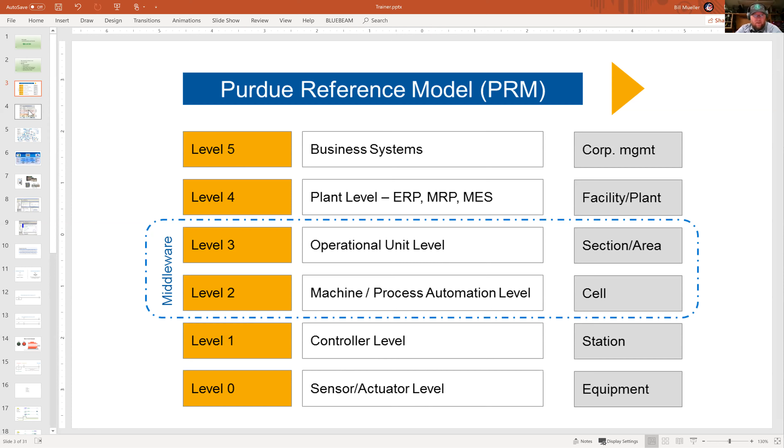Above that is actually how the plant gets designed. And from what I understand from dealing with other chemical engineers, your classes actually deal with this as one big whole, where they design the process, they end up sizing the tanks, doing all the math and stuff. That whole process of when you guys build your facilities incorporates all of this. For this particular class, and from what I've seen so far, you guys are really just focusing on level 1 and 2. To remove some of the abstraction, this is another way to represent the same data.

Up here, this is all the business services and stuff, but this is where you start getting all your reports. I know this is hard to read, but you guys can pull down any Purdue model thing and it shows you 50 different ways. But it's just a way to segment it out, and there's people whose entire job is just one of these types of segments.

What's kind of cool about what you guys are doing is you're actually covering 3 of these at the same time with that VFD and the controller and that sort of thing. This also gets closer to the plant floor and for specific processes. So if you end up having an entire biotech processing line, these pieces down here at the 1 and 2 would be an individual bioreactor, bioinoculation skid, that sort of thing. Or if it was for food processing, it might be a mixer or an extruder, that sort of thing.

And for you guys that really want to get into plant design, this is what it really looks like when you start breaking it out. So all 3 of these slides are the exact same thing, getting closer and closer to how real life goes. If you look really close down here at the bottom, you end up seeing this box here with a drive, controller, and I/O. This box here is where the panel you guys have built would live in this entire system that would be a plant floor.

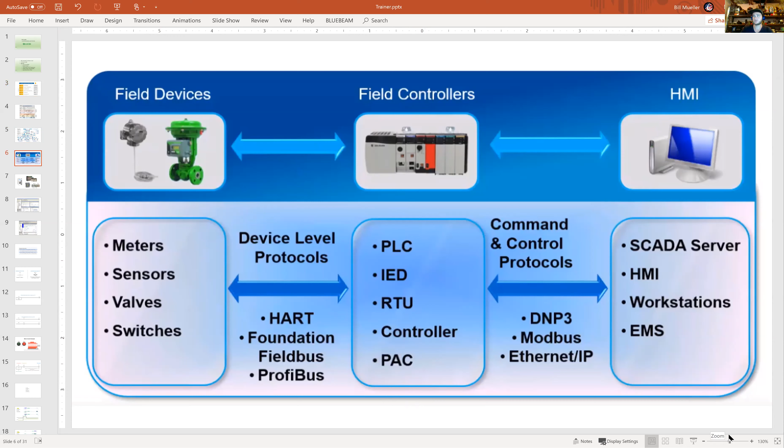And if I saw the picture correctly, you have, can you see the right-hand side of the screen or is it blocked out? Should be able to see it. I know in the very top right, there's going to be a blocked out section for the recording. Oh, okay. Let's zoom it out just a little bit and see if I can make it a little bit more visible.

So the HMI is the human machine interface. That's where you're going to make all your screens and where you actually end up interfacing with everything that's beyond just the normal push buttons.

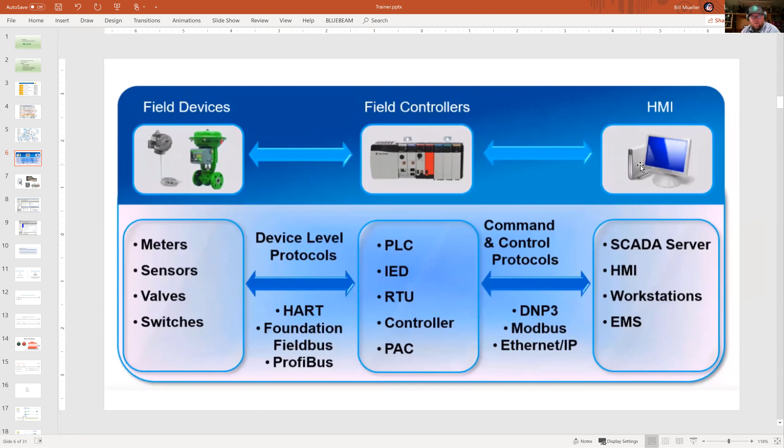As far as controllers go, there's a ton of them out there. Here's a picture of what yours should look like. And these ones are more what I deal with in my day-to-day life. These 3 processors here are different parts of the same family. They're all Allen Bradley controllers. This one has to do with safety and verification for like nuclear plants or highly sensitive wastewater type stuff. These are just general purpose, and these are for smaller scale projects.

Siemens processors, they're around. A lot of the world's been sliced up by manufacturers. So Allen Bradley has most of North America. Siemens has most of Europe, European style programming. So depending on where your equipment comes in, you'll see one or the other.

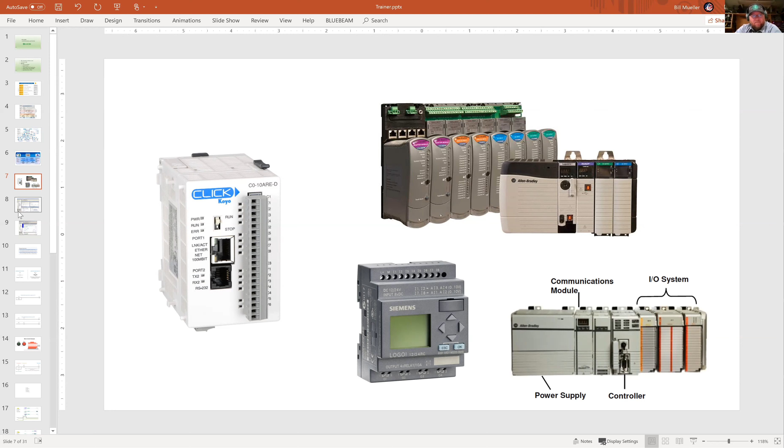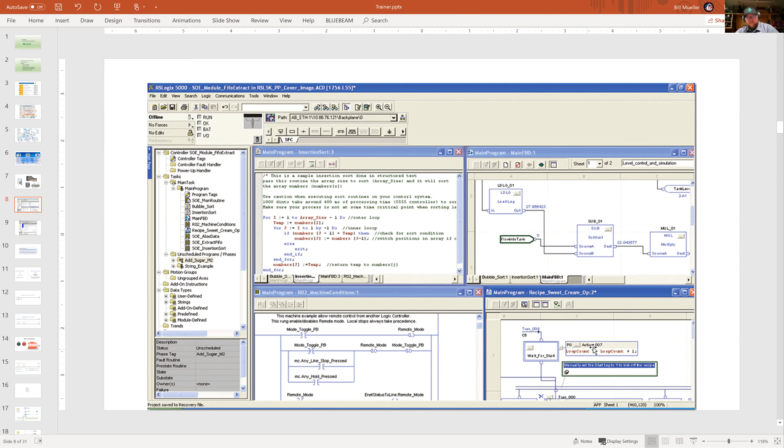And down here on the bottom right, I had to dig deep to find an example of this, but sequential flowcharts. I don't know anybody that programs in them, but I hear it's really popular in Europe. So sorry, I can't help you too much on that one.

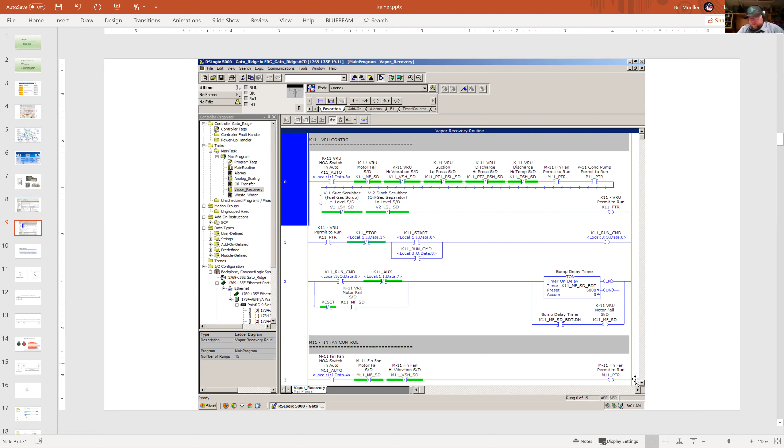And all these other ones are process specific safety stuff. So if any one of those safety components end up coming in wrong, then you don't want to be able to allow that pump to run. The other big important piece on here, I'm going to try zooming in just a little bit so you guys can see this, is normally open versus normally closed. You covered it before.

The normally open contact here turns to a 1, or is energized, when it's closed. These guys here are normally closed contacts and are energized when they're opened. The reason for that is that for really important safety components like the motor fail, vibration, low pressure, high pressure, using a normally closed like this guy would tell you if a wire fell off.

So if you end up having a fail-safe type system, you want to make sure that even in a failure condition, if somebody's out digging a trench someplace and cuts a wire, you want to have it assume that it's in a fault condition. So selecting these guys was really important.

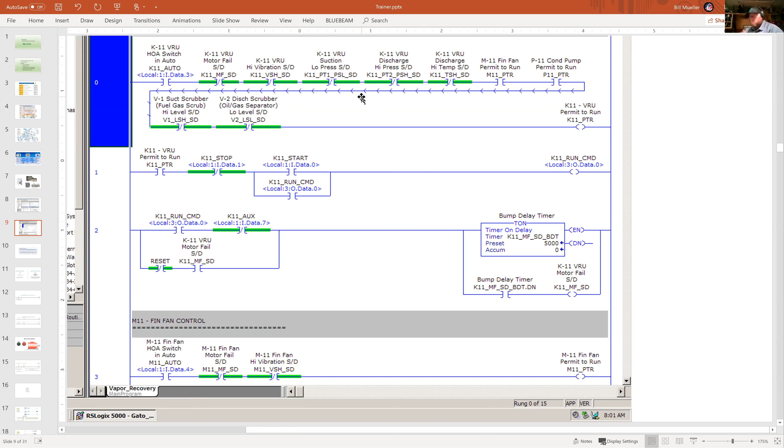They probably have a version of them out there where 1 means good. But in this case here, they're using them as a fail-safe condition. And it's all process specific. I don't know if I explained that great, but that's the reason for all these. And actually, this timer is also another safety condition as well.

When you have these very large VFDs, they take a lot of current. And when you start up a pump, a 3-phase pump or even a 2-phase pump, they use big contactors. They look just like relays. And the really big ones, they're like 2 fists that when you turn them on, they'll clink ka-chunka together to make the electric current go through.

And then there's a big spring that when you turn them off, it actually has to ka-chunka pull them apart. And that's because there's so much voltage between it. You need to have that big surface area and spring assist to be able to pull it apart without them welding together.

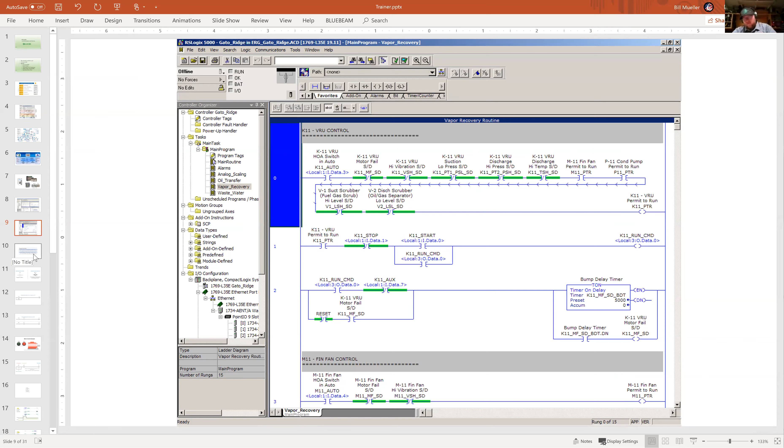The timer that you're seeing here is intended so that you can't just go up there and go start, stop, start, stop, because that thing will be just going ka-chunka, ka-chunka until it welds itself together. So this is also a part of the safety circuit. So anyways, that's what we're looking at there. Yeah, that's process specific. When you guys go to develop your own, you'll dial those in yourself.

So I made a reference to the 4th dimension. And this is one of the parts that's really hard to see when you first start programming. It requires an innate feeling of how the program executes. So every rung ends up executing from left to right, top to bottom. Seems very easy to understand at first, but later you'll see that because of this, we can end up doing some really fancy

programming that's non-intuitive. Every time the PLC code goes from the top of the program to the bottom of the program, that's 1 scan. And the PLC, when it's on scan, just keeps on ripping through each of the rungs in the same order. I copied this from somewhere else. It should be obvious that a PLC could complete many scans in a single second.

But an example of this would be that, out of those processors we saw above, the Allen Bradley stuff executes between 10 milliseconds and about 50 nanoseconds for a scan. I didn't look up what your Click was, but I would imagine it's probably between 20 and 30 milliseconds for the type of processing I saw it doing.

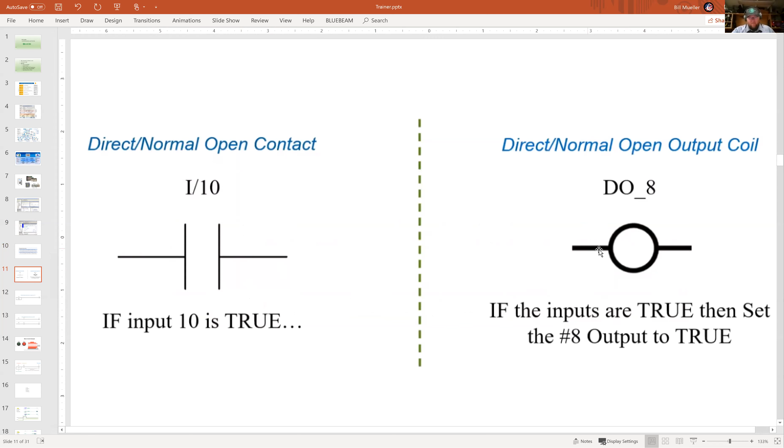And you guys used a set of lights, but realistically, you can use the same thing for controlling a motor. If you want to start the motor, if you use just the straight coils, like in the example from last week, you press start. As long as you're holding it down, the motor will be jogging. And if you want it to stop, you click stop, it stops. So that code looks just like this.

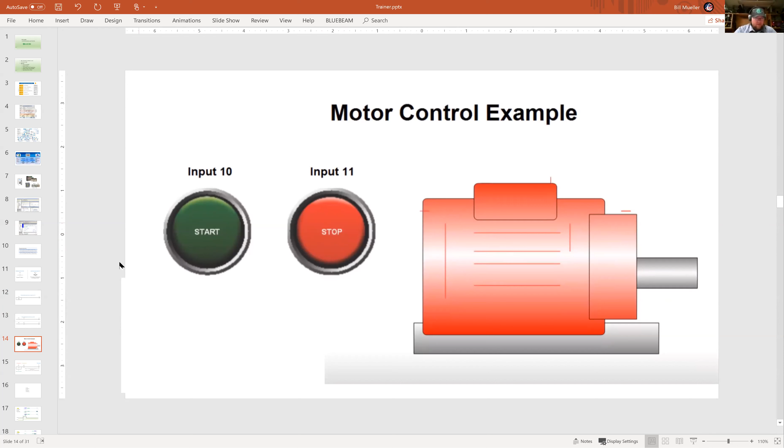So if we end up having either one of these be true, the motor will start. And it'll continue to run even after you let go of the start button until somebody presses the stop button. I'm going to go into a little detail on this later, but this is called a latch. And this is one of the primary things that a PLC is good at. And this only works because of the scan and playing with the fourth dimension. So we'll get to that here down at the bottom.

So any questions on the review stuff so far? Cool.

So these, except for the sequencers, are going to be the main components I'm going to cover for what you need in your toolbox when you're programming a PLC. These use those primary data type objects like the normally open, normally closed, timers, that sort of thing that's available to you, but it ends up putting them in a certain way that you're going to see repeated over and over again, that with practice you'll see where their application is in a system.

So the first one and the easiest one to do is a latch. And this looks a lot like that motor control. And I didn't number these because I spent like 5 minutes putting these together. But this is the same rung 3 different times, the same rung at 3 different periods of time. So this top rung is at its default bench state. A little green box on there means that it's passing electricity. Nothing on there means it's not passing electricity.

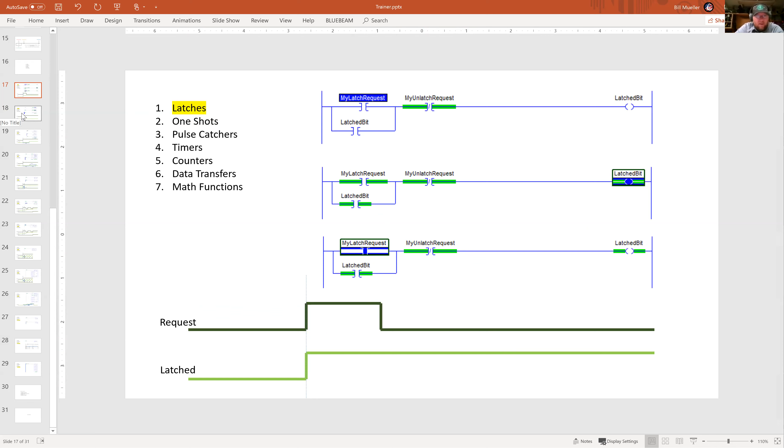One-shots. One-shots are my particular pet peeve. I wrote an entire LinkedIn article on why one-shots are a bunch of crap and why you should do it my way. But one-shots are really useful for non-obvious reasons. One-shots mean that you'll end up having a bit on for exactly one PLC scan. So if you're doing mathematical functions, if you're doing resets, it's always nice to be able to turn a long pulse into a single pulse for one PLC scan. And there are examples further down.

But the way this works is, again, 100% due to the way the scan works. So left, right, up, down. When we sit here at rest state, my request is off. So electricity is not passed across here. Request one-shot isn't there. One-shot working is not. On the very next scan, my request turns on. That's the edge right here. When it comes through, one-shot working is still not on yet. So we can go ahead and turn on the one-shot for that. We finish up, cycle around the scan, come back to the top.

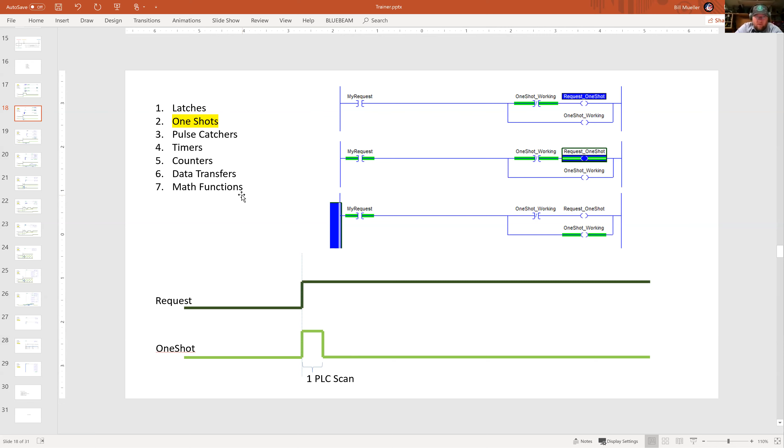My request is still on. But now one-shot working is on. So that means we no longer have the one-shot anymore. So as long as my request is on, we're only going to get one scan of this guy. So it looks just like this. On the leading edge of request, we get one pulse out of it. It's very useful. Well, this is important to build off of for the next section.

Timers. Timers are primary data types, and the timers in this case work the same way as they work on the Click as well. At their rest state, you end up giving it a number that it's going to count up to. In this case, this is done in milliseconds. So 3,000 milliseconds is 3 seconds. And what we're trying to do is delay this request bit by 3 seconds. As soon as my request comes on, the timer starts timing. These little dingles on the end here are the output bits. While it's enabled, the accumulator's counting up to 3,000. The done bit doesn't turn on until it reaches that time.

Here's the next one. We've reached 3,000. Done bit's on. Done bit's on here. So now we end up having the delay sequence. So this little piece of logic just takes a pulse and shifts it over 3 seconds. So you can either shift a pulse for 3 seconds, or we can hold it for 3 seconds. There's all kinds of stuff we can do. It seems rudimentary, but it's used all over the place.

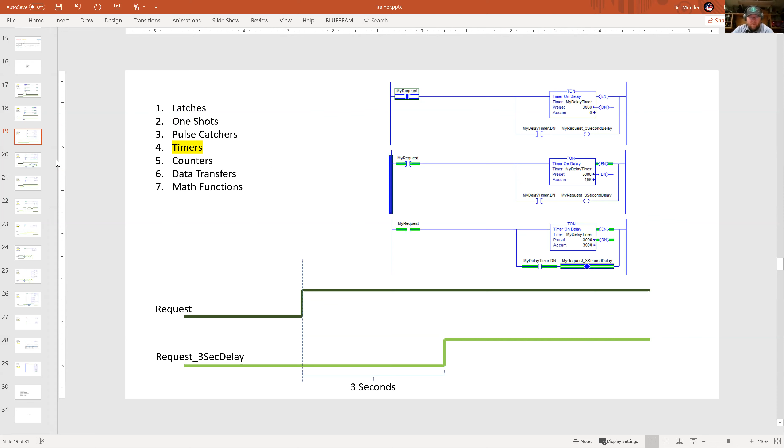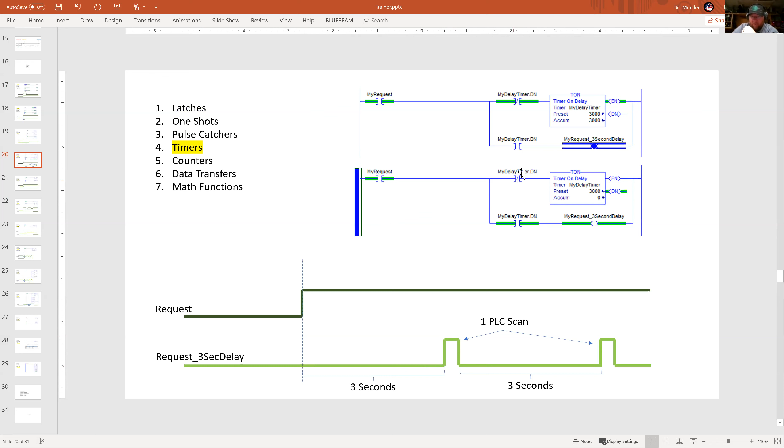And you never know when you're going to need something stupid like this. I've used it a lot. Actually, the most recent one that we used this way was for doing a video game in a PLC. We needed a game clock to synchronize user inputs with, and this was exactly the way we did it. But it's manipulating the scan time, the left to right, up to down, to make this work that way.

Counters are intuitive. It's basically just an adder. There are count ups and count downs and all kinds of other random ones out there. But when you first use this, it's a little non-intuitive. If you wired it up just like this, where you have the counter on one side, we're going to count up to 3 and then say we're done. If this was a push button and you push that button once, you would think it would only count once. But in reality, every single scan, it's going to increment once. So for as long as the request is up, it's just going to keep counting each time through.

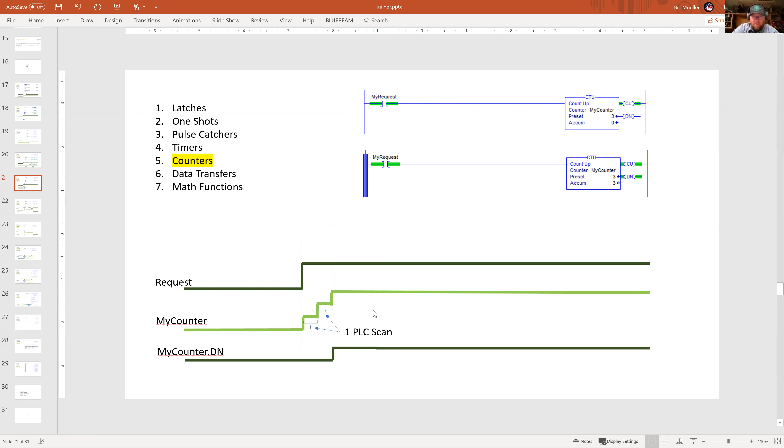The important thing to pull out of this is that this is one of those examples where if we ended up having a one-shot in here, we can end up with a count every single time that pulse comes in and synchronize it with the PLC scan. The other thing to catch out of this is the done bit. Just like the timer, once the accumulator hits whatever your preset was, you'll get the counter done bit as well. So request comes in, counts 3 PLC scans, and then you get 1 bit here.

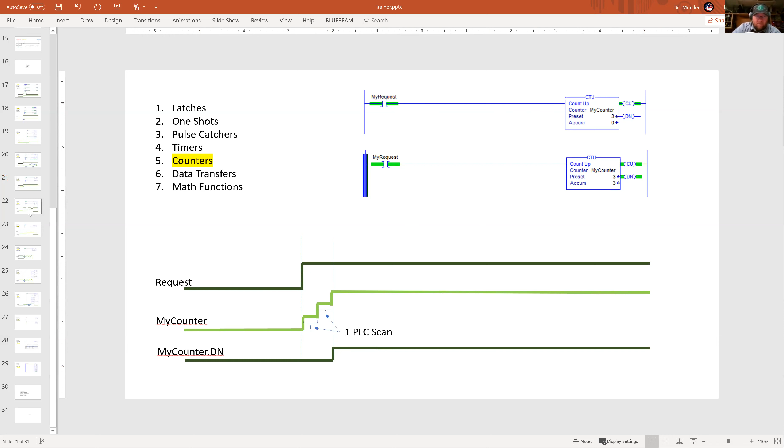How can we use that for our help? Here's that one shot. This is the one shot we did right before. We can end up saying, here's my request, turn it into a one shot, use the one shot to increment, do the counter. So request comes in, comes up, is held for longer than 1 scan, but the counter only clicks up, chink, chink. When you release the my counter here, I did this wrong. So this little slice should actually be on the leading edge, not on the falling edge. So this one's done right, and that one's done wrong.

But each time you press the button, it'll count 3 pulses, and then once you get to the 3 pulse, there you go. But this looks like garbage, and if you ended up having 1,000 valves or whatever it is to do, it's a little bit complex. So you can end up rearranging it so that you can use that same one-shot logic, and instead of having an output in the middle, go my request this way, and it'll count up the same way, except again, this is on the wrong thing.

So building a one-shot this way, hold on one second, through the front door. So

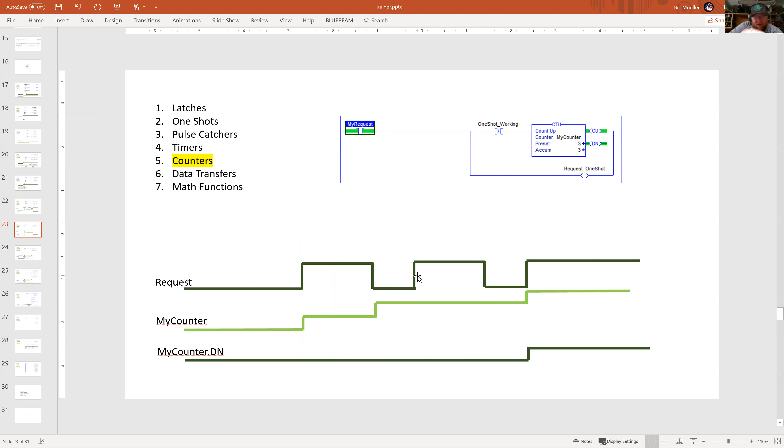Yeah, so you can start building it up this way using that timer piece. Messing with it even further, counters also have a reset bit, just like the timers. So if for whatever application you're doing, you want a repeating waveform that looks like this, you can use that counter done bit to trigger the my counter reset. So as the request comes in, my counter just starts, the accumulator starts giving you this waveform generated like that.

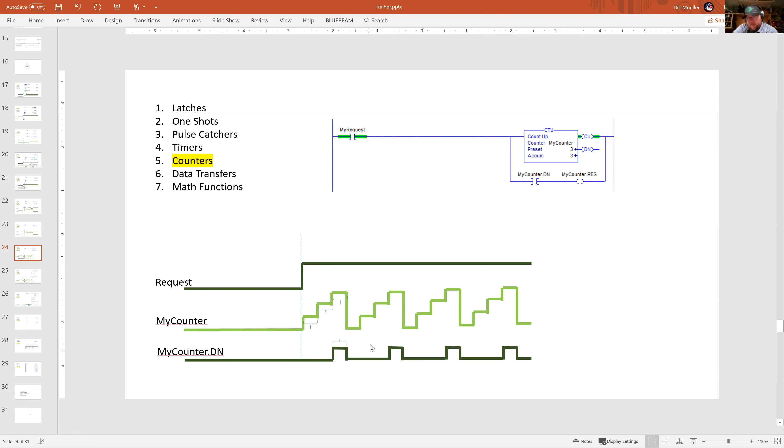Kind of cool at the other side is that you also get these one shots for the done bit. So as soon as it hits done, drops off, comes back up. Again, I don't know why you would use this, but the most likely way you would use this is some sort of sequencer type deal, or whatever your application needs.

Forgot I did this. So this is for the rudimentary sequencer. Say you end up having something simple like your coffee pot. It really only does like a couple steps, or like a traffic light or something like that. You basically have this guy free running, giving us our pulses here, but we end up using the comparison to select the steps. So as this guy keeps counting up from 0, 1, 2, 3, if we're less than 1, do step 1. If we're at step 2, do step 2. If you're at step 3, do step 3, and then reset yourself. So here, whatever your sequence is, you can have discrete control over your sequences.

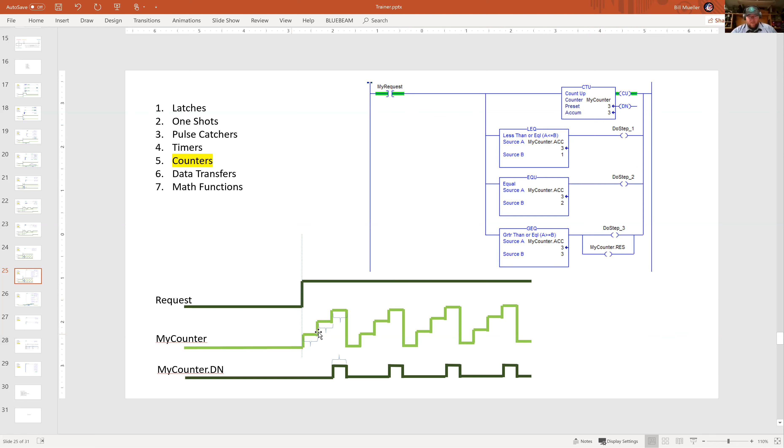This one's not the smartest thing, because basically your sequence is stepping through at the speed of the PLC scan. So if we go back and add our timer into it, we can end up now stretching out each of the steps. So the timer runs when it's not done. As soon as it hits the preset, resets itself. That single pulse that we saw from above is what's being fed into the counter. So each time it rolls through, the counter steps up. Each step up, we do whichever step we're currently on.

So this builds up from what we started with before, where there's no latch in this one, but we're definitely using a one-shot right here. Using the timer, using the counter, and using your discrete steps to pull it all out. If you were handed this thinking, hey, how does this execute by itself? It's kind of hard to see until you really try to map it out with some sort of either waveform or some sort of table to show you how everything changes over time. It's a little bit easier to go.

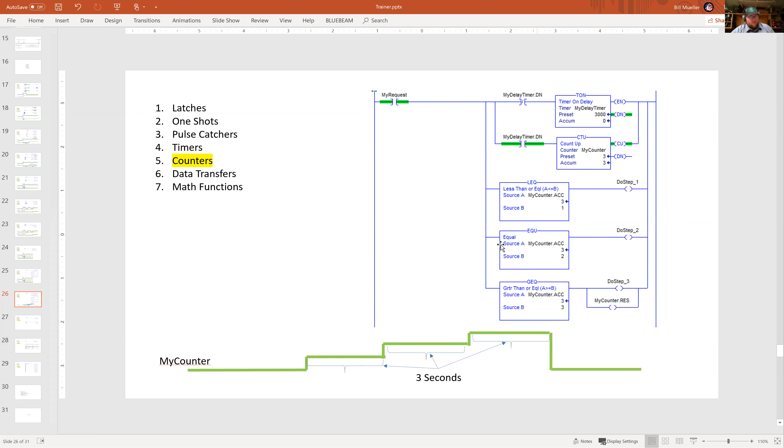If you tried this in a modern day programming language like Python or C or VBA or whatever your poison is, it wouldn't work the same way because it doesn't leverage the scan of the PLC the same way.

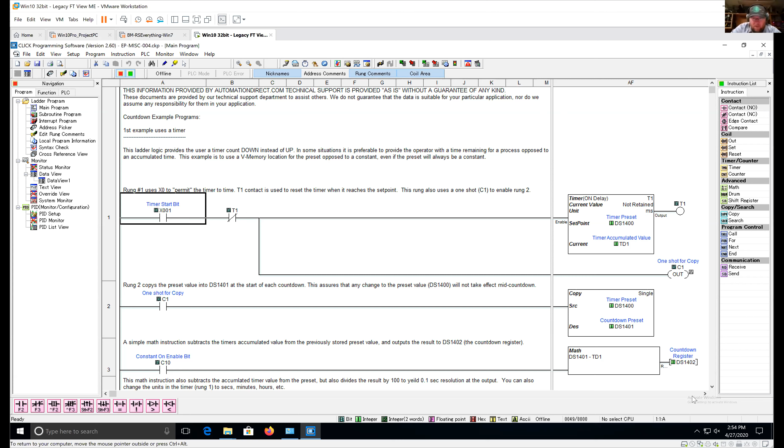Here you can see that it's got a one shot in there. They use the instruction that I hate with burning hellfire, but they're using it here. And then they're using this guy to copy over the preset and doing the math to subtract it out. So what this will do is that they only have the timer that counts up, I believe. And so what they're trying to do is show a countdown timer.

So say if you are doing a transfer of some sort, some fluid from one vessel to another, it doesn't help them at all to know that the transfer has been happening for 20 seconds. What they're really interested in is when they have to start paying attention to it again. So say the transfer takes 30 seconds, having a counter that goes 30, 29, 28, they can ignore it until they see it's at 5, 4, 3 kind of thing.

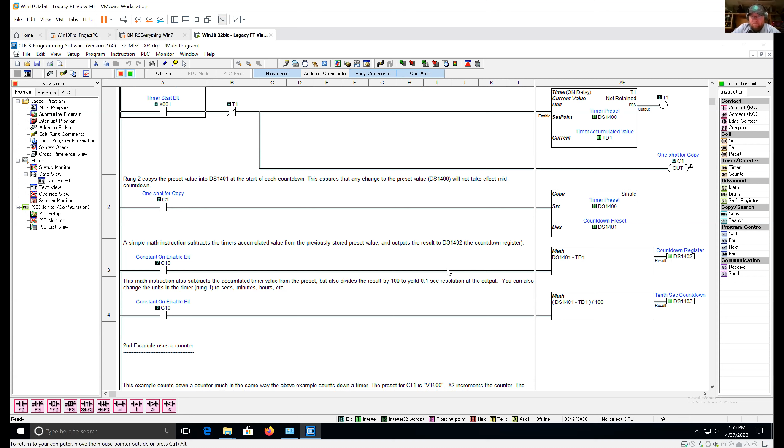So they're using the copy command into the preset and then doing a math block so that they can end up displaying on your HMI how much time is actually left. It's kind of a clever way to do it. And that's based off the timer.

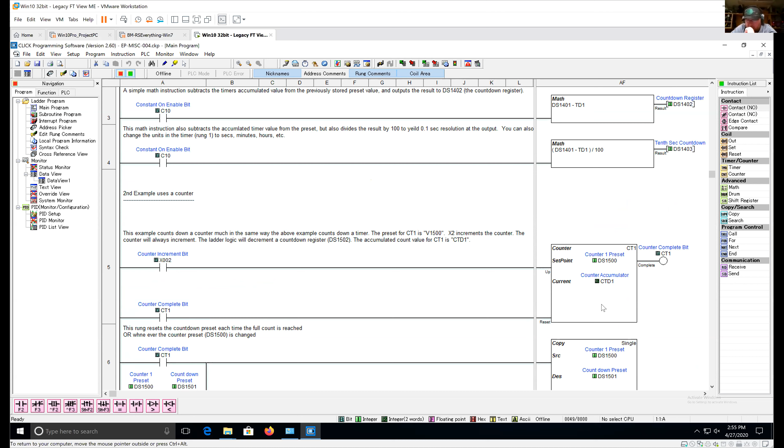Here's where they do it based on the counter. Here, instead of a timer doing it, they have a counter doing it. So if you press X2, the counter counts up, keeps counting up. They end up grabbing that bit. Once your counter is complete, copy the values over. That's what this guy's doing. And then do the same thing for the math.

I didn't read the comments too much, but when you would use a counter in this way, instead of using this counter increment bit, using the timer done, you can use the timer, have the timer rip through seconds, and then use this counter to count minutes based on it. So then you would set this counter preset to 60. So after 60 seconds goes by, the counter counts up to 1. You now have an easy way to display the minutes. And then feed this guy into another one that does hours and days and all the other good stuff.

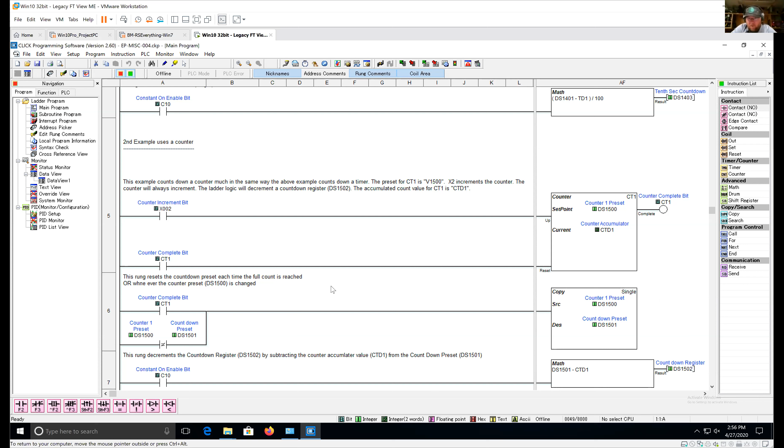So this is pretty complex. To start with, it shows the counter and the timer functions as similar. There's only one time dependency on here, and it's with that one shot that they're using up above. So, oh, and you have to make sure you use the END. That is infuriating that you have to do that. But remember the END, because it doesn't tell you why it's failing to compile if you forget it. Yeah, I'm with Bill on that.

It drives me nuts. One thing I wanted to point out, it's super important, and maybe you didn't pick up on it. When he talked about how all these timer and counter values are stored in memory locations, that's very different from how Allen-Bradley does it. In the previous examples, those values are basically discretely stored in that function, whereas here, these are stored somewhere in memory, and you can externally access those memory points at any time. So if you want to dynamically access and change that counter value, you can.

So for example, you could have somebody go in and type a value on your HMI and change what that preset timer value is. Yep. Yeah, it's a big deal.

So it looks like we've just about run out of time. So I only got through one of these examples.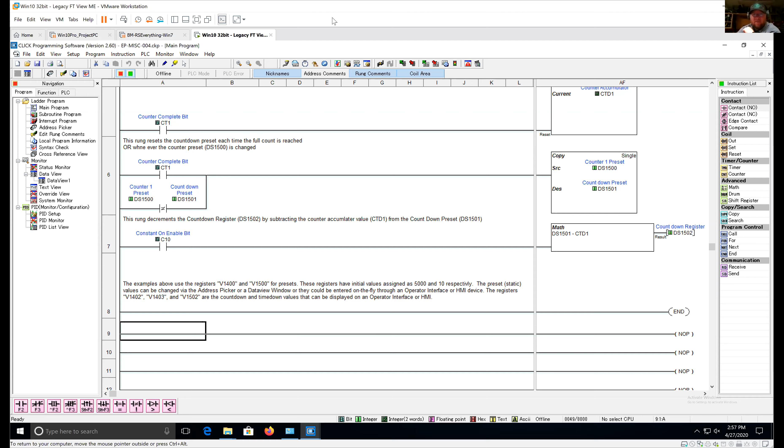Hopefully you guys ended up finding this somewhat interesting. Realistically, what it is, you guys are going to be working on your own programs and try to remember what that dude told you about to solve this problem.

But yeah. That's why we record these, Bill. Oh, yeah, I can't wait. They were eagerly awaiting to watch this back at the office. So. Oh, yeah. Hi, Jacob. Hi, Marie. You're going to be YouTube famous, Bill. In my own little corner of the internet.

So. Okay. Cool. So any questions from anybody? We got a couple minutes left. Well, how about this? Question, actually. So the 7, I don't know what to call them, like methods or configuration, the latched and one-shot things. So we don't have some of those in the Click software, it looks like, and then the Click software has some other ones like drum and shift or something. Are those specific to the software that you're using, or are they universal?

Yeah. No. So you're right. Everything you're saying is right. So what I did is I picked, so the Click, going back to the 7 that I ended up showing before, those all can be implemented inside the Click processor. Sort of similarly, the only real difference is that in the examples that I gave, the normally closed, normally open contacts were registers, but for binary. Those binary registers don't exist in the Click software.